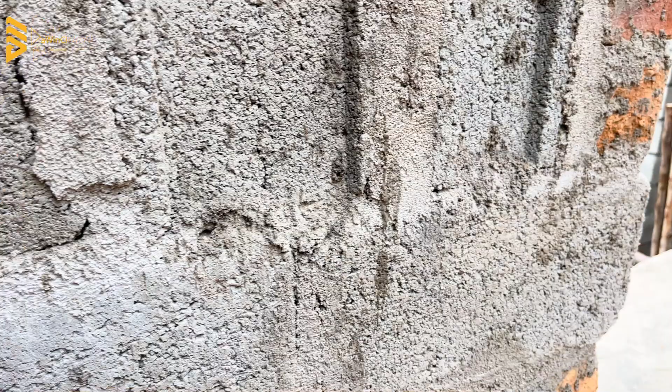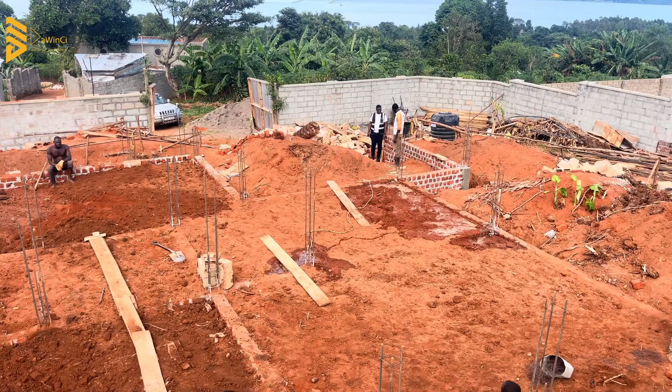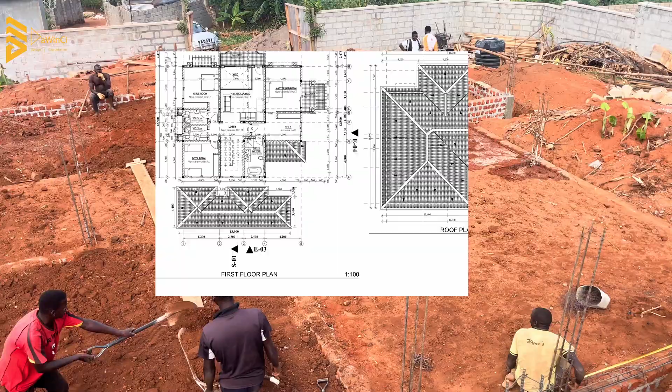In this video, we are going to discuss the documents that you actually can't build without. First of all, you can actually build with none of these documents. Yeah, in Uganda, anything is possible. You can build without a plan, without a structural design, even without approvals, just by telling the builder, you do like this, and then the building is up. But in this video we are going to discuss the documents that you can't build without.

The building we're talking about is building right. So you can't actually build right without these documents. I'm not going to mention them in chronological order, just out of the blue. And just a heads up, you can build with just some of these documents, not all. Some of them are compulsory, some are essential, some are mandatory, and others are not.

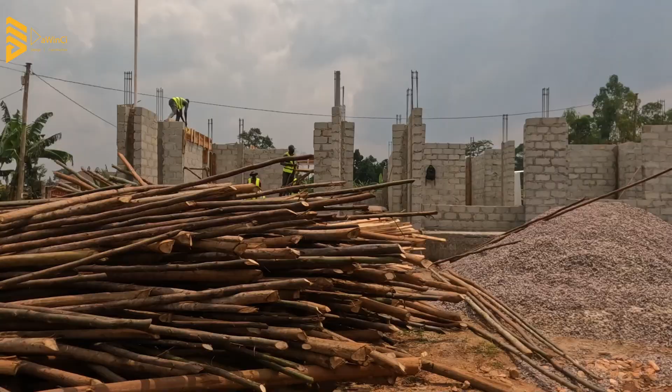To start with, I want to mention one of the rarest documents, the LC1 letter. That is the letter written by your LC1 chairperson, your local chairman, introducing you to the council, saying that they actually know this person. Now, if you're building in different areas, you'll find that a lot of areas in Uganda do not require that document. If you take your plans for approval, not all municipalities or town councils will ask you for these documents.

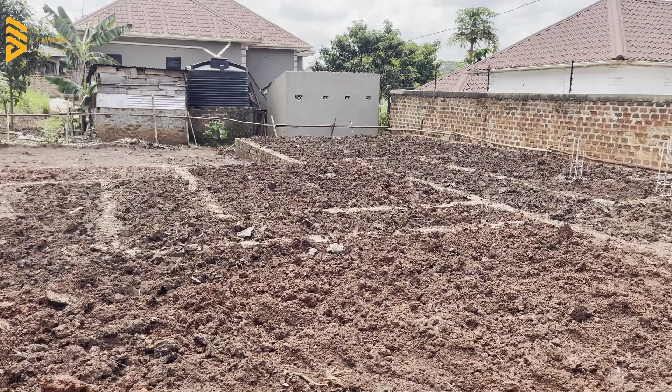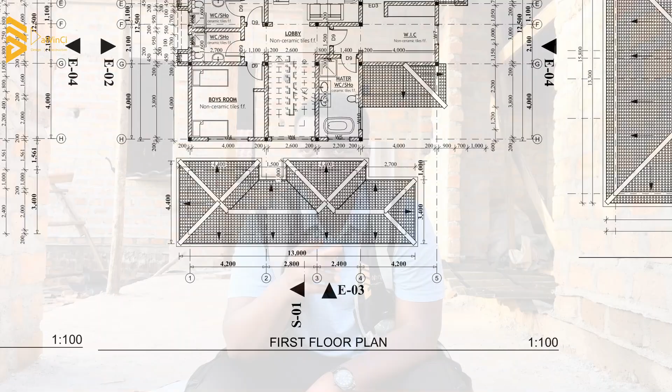But because there have been a lot of land wrangles, where two people are fighting over the same plot, one will just go start construction so he can use it as evidence in court to show that he even started building, he even got approval. So in areas where land wrangles are prevalent, when you take your plans to the local council for approval, they'll ask you for a letter from your LC chairperson to show that they actually know you and that you own that land, because a lot of these other land documents can be forged.

If you're building in places like Kajjansi, Wakiso, or Kasangati, you will need that letter. It basically introduces you, through your chairman, to the town council, confirming that they know you and that you're going to build in this area. In a lot of other areas, you don't need that document as long as you have the rest of the pre-requirements for approval.

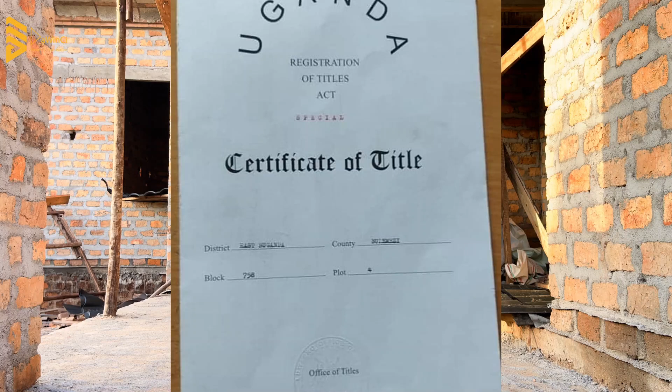The other document is a land title. Of course, this is for people building on private mailo land, not really on Kabaka's land. Usually people on Kabaka's land don't have titles, so they just have sketches of how their land looks, the dimensions and all that. But when you have private mailo land, you actually have a title, which shows the plot number, the block number, the location of the plot, and also the names of the owner of the title. So a land title is really important.

That brings me to what we call a survey report. In areas that are not private mailo land, like Kabaka's land, you might have dimensions like 50 by 100 by 130 by 100, but those aren't really exactly accurate. That's where the surveyor comes in, when you're building in a place and you don't know where the mark stones are, or sometimes you have a very old title and the dimensions are not to scale.

They are there, it's 30 meters, but it's not exactly to scale. That's why you need a surveyor to actually make a survey report to show exactly the shape of the land and the size of the land.

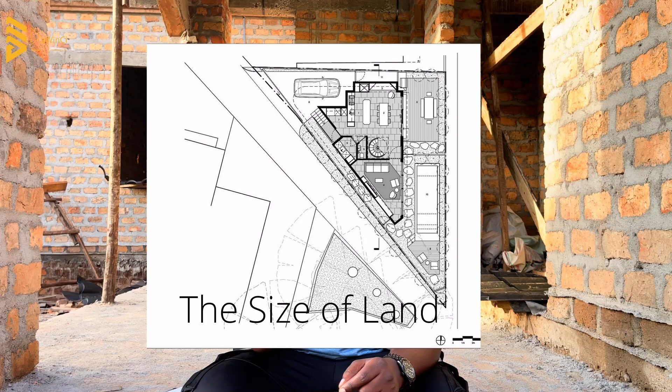That's very important. Actually, in some areas, in some town councils, to build you must show a survey report. You can't build in Kampala, KCCA, without a survey report. It shows the different encroachments that have happened on the land.

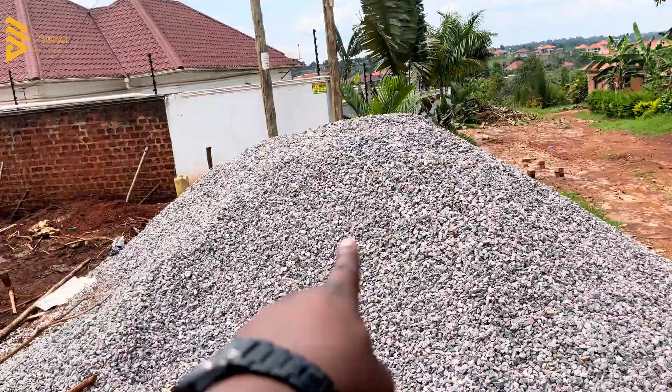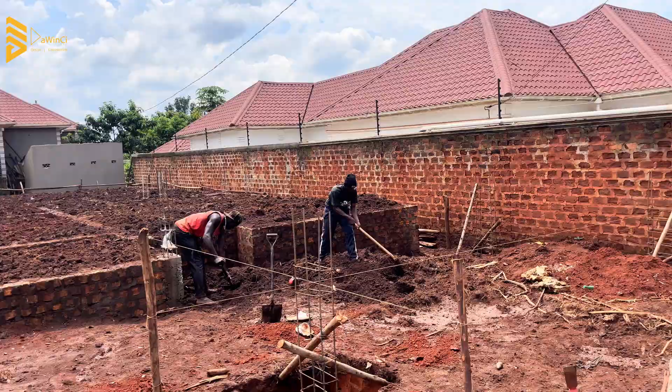It shows if probably they built a new road there, it needs to be showed on the title. If there is an electricity pole, if there is a drainage system by the council that is passing through there, it has to be shown. If there is a pipe of national water running under your land, it has to be shown there, okay?

So that is basically to avoid all discrepancies of finding that we've designed something and then we reach on ground and it actually doesn't depict what the title shows. So that's very important.

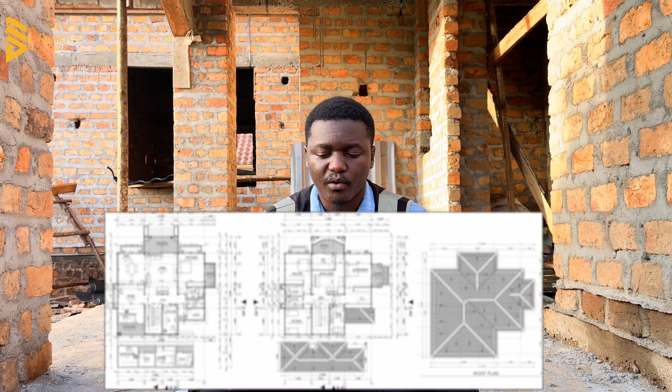Now the other one of the most important documents, actually this is the most important document, is the architectural design. Now an architectural design is basically what is famously known as the plan, the plan of the house.

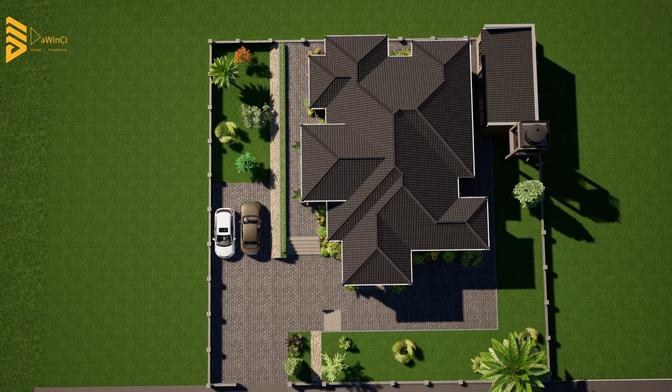Though it's actually referred to as the plan of the house, it's actually more than just a plan. A plan is just really viewing the house from the top. It has the floor plans, it has elevations, it has also, most importantly, artistic impressions. I've seen scenarios where people want to build and they have a plan, elevations and all that, and they don't have artistic impressions.

Artistic impressions are pictures showing how the house is going to look like on the outside. The plan in our age and era cannot be sufficient to actually provide enough information for someone building, or a contractor, to actually pull everything from the plan and put it on ground as it is.

So basically when you look at details on the plan, sometimes it shows how the drainage of the compound is going, which parts have grass, which parts are green, which parts are not, and it shows the roof plan—basically everything, how the rooms and spaces are arranged, the size of bathrooms, sizes of windows and all of that. So an architectural design really is like the benchmark of everything.

Before you build, at least with the plan, you can build even when you don't have all other documents, okay? Then the other document that I should talk about is the structure design.

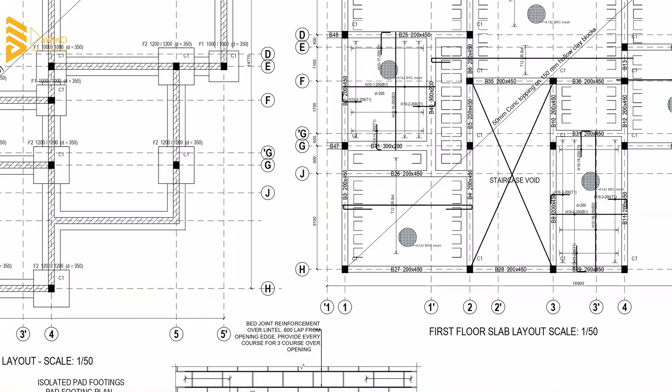Now, a structure design is basically the design showing the iron bars, I mean the reinforcement detail, the sizes of iron bars, their arrangement, the sizes of the rings, how deep is the foundation, what's the size of the pad footing, what's the reinforcement in the pad footing.

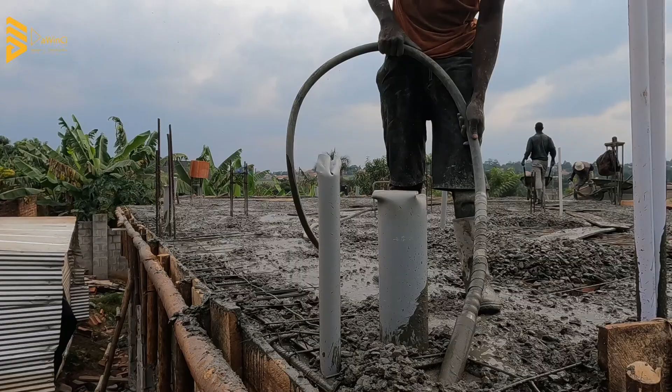What grade of concrete are you using? Are you using grade 25? Are you using grade 30, grade 32.5? What grade are you using? All that is detailed in the structure design.

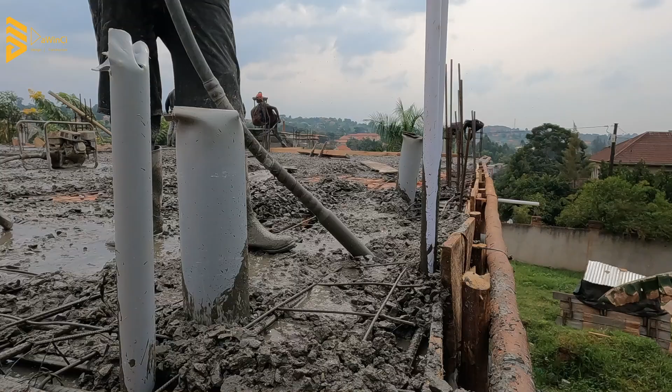Now, to be frank with you, if you take approvals out of the picture, you actually can build without a structure design—by any engineer who has developed good judgment of how reinforcement should be arranged in a building. The challenge with that is there is a lot of speculation.

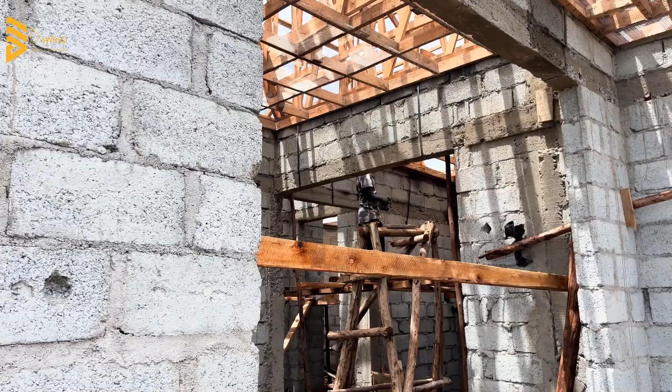So most of the times you are designing so that the building is safe. When you predict that we'll need 4 iron bars in this beam, you'll say, because I haven't designed, I will put extra 2 bars just in case I haven't calculated well. So you find yourself over-designing, putting more reinforcement than the building actually requires to stand on its own.

And then also, remember when we are doing structure designs, we actually use software. Quite a number of softwares on the market can actually do structure design. Whereas they are designed to be used by technical people, that is structural engineers, someone who has had a lot of technical know-how in the construction industry can actually use those softwares to produce a structure design.

The problem with that is that a lot of these softwares are based on foreign systems. Usually the ones on the market use the Eurocode. The Eurocode is actually based in Europe. So the problem with that is...

When you get different elements from a building, that is mainly I'm talking about storied buildings, and then you put them in the software, the software automatically calculates for you everything that you'll actually need, the reinforcement bars, the details.

It can even produce for you some things that are working drawings. Now, the problem that comes with that is that most of these softwares will over-design. That's why you find people when they're building and putting Y16s in beams, when there's no span, no clear span that exceeds 5 meters or 5.5 meters.

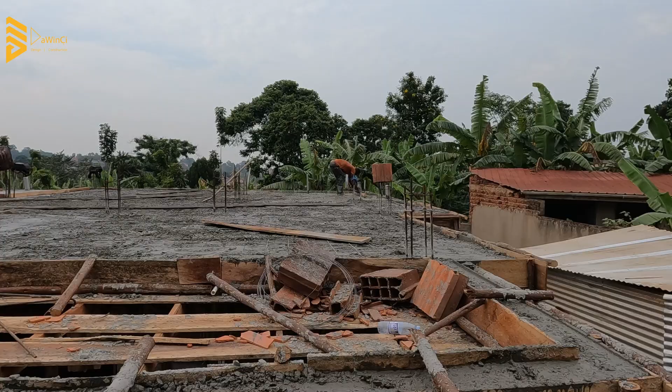Now that's a big issue, because whereas you're trying to cut the cost of getting a structure design from an actual structural engineer, here you're actually paying more, but this time in materials, not in the design itself. So you find you're having a lot of reinforcement, a lot of strong concrete, even when the building might not actually require it.

So that's very important. So at the end of the day, I had talked about the architectural design. The architectural design has to be stamped by a registered architect, and the structural design has to be stamped by a registered structural engineer.

Now, all those, of course, are on blueprints and all that. Why I'm saying they must be stamped by this and that is because this is a pre-requirement for approval. You can't take your plans or your structure design for approval unless they're actually stamped by a registered engineer and registered architect, respectively, as I mentioned before.

Also, just to clarify a bit between the architectural design and the structure design: the architectural design is basically for bungalows, and then for storied buildings, you need both an architectural design and a structure design, because a bungalow does not have structural columns mainly. It's really at a very minimal level, basically walls and the roof and all that. There's no need of a lot of digging, excavation, and putting pad footings and all that.

But when it comes to a storied building, you have to have a structure design, because it's basically the structure frame that is holding the house together. There's a suspended slab over the ground floor, so it has to be structurally designed. So if you're building a storied building, you must have a structure design. For a bungalow, you can do it without one, it's actually not a pre-requirement for getting approvals from the local authorities.

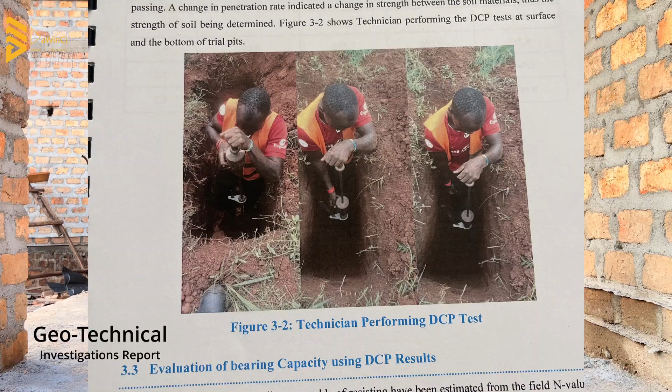So let's go now to the Geotechnical Investigations Report. This is a report usually for areas that are in cities. You know how Uganda has been cityfied these days - not sure if that's the right word, but many areas have actually been made cities. We have Gulu City, Jinja City, Mbale City, Mbarara City, Kampala City. So all those are now cities.

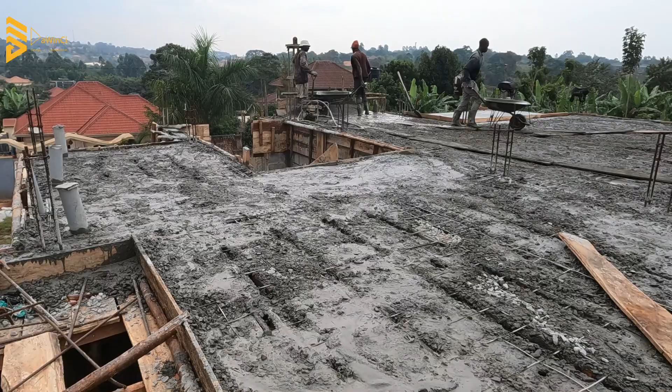So as they become cities, the planning becomes more stringent. So whoever is going to develop in such areas, or areas within the vicinity of the city, the regulations become more and more. So if you're putting up a structure that has more than 3 floors, it is compulsory to actually make a geotechnical investigations report.

Now, this report basically shows the strength of the ground at different levels. So this is a document that is going to aid the structure design. The structure design this time is going to be based on the geotech report.

That document basically involves going to the ground, digging different trial pits where the building is going to sit, and then taking those soil samples to the laboratory to do different tests on them. There are shear box tests, dynamic cone penetration tests - all those tests involved, okay?

After getting those results from testing in the lab, we use those results in actually making a structural design, just to be sure that the ground where you're building the 3 floors is actually able to hold them, or if it's not able, at what depth must the building be for it to be able to carry that building.

So that's very important. If you're building 3 levels and above, it has to be there, and it has to be stamped by a registered engineer. Or it has to have a stamp from a certified laboratory, a laboratory that is certified to actually test construction materials, and that's very important too.

Then the next one we can go to is the electrical, mechanical, and plumbing drawings. Usually they call them MEP drawings. Though to some extent, mainly for residential buildings, it's mainly in the line of electrical and plumbing drawings - I think I've explained this before. Basically, this is where all the lighting points are indicated, how the wiring is going to go in the whole building.

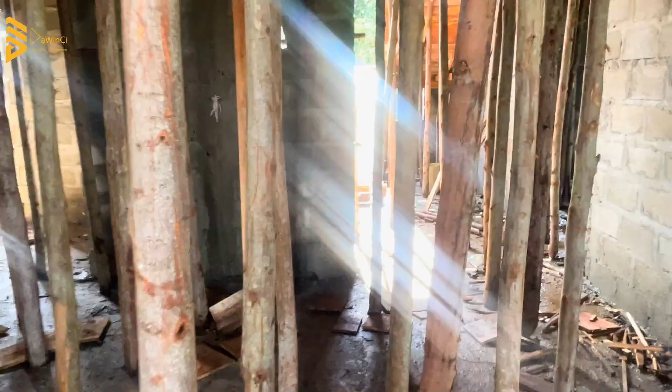With that kind of arrangement, it's possible to actually build without these drawings, because at the point of the slab, you can just bring an electrical engineer or electrician to provide different wiring points. The problem is that there'll be a lot of speculation and guesswork. Someone might say, this is a living room, so we'll just provide for one light in the center. But in the design, you may find you didn't want just one light — you wanted one light and maybe four others on the sides. And if the electrician on ground has nothing to follow, he will just use his personal judgment.

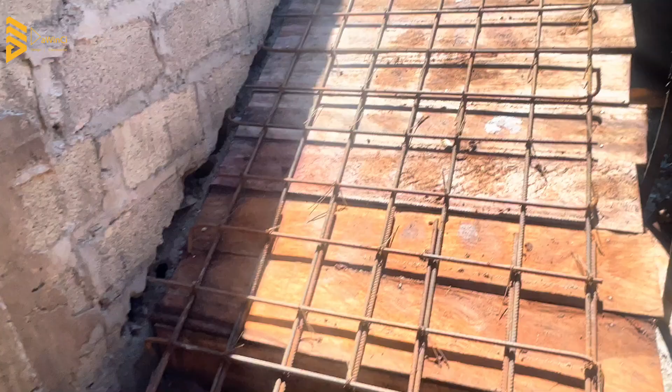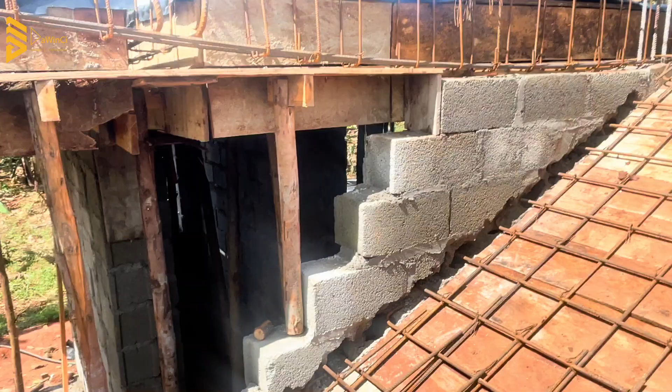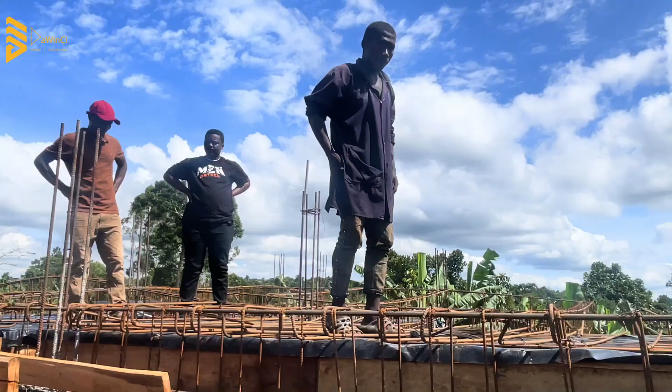If you don't pass through those conduits earlier, you'll find in most older buildings that there are wires running on surfaces of walls, and plumbing pipes running on surfaces of walls, which really does not look desirable in the modern age. But with electrical and plumbing drawings, a lot is planned very well, such that even when you reach a building, you hardly can see any pipe, or see where any pipe is actually coming out of the building. That's very important to note.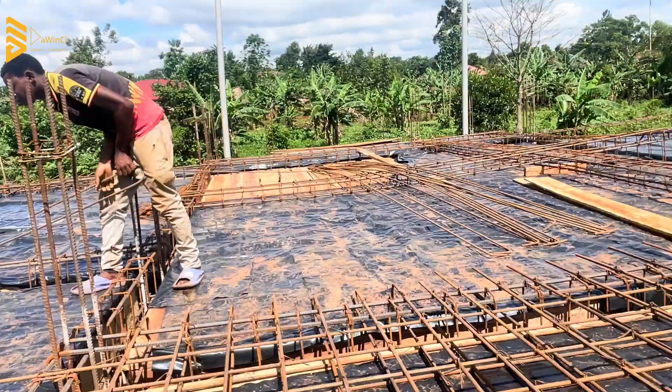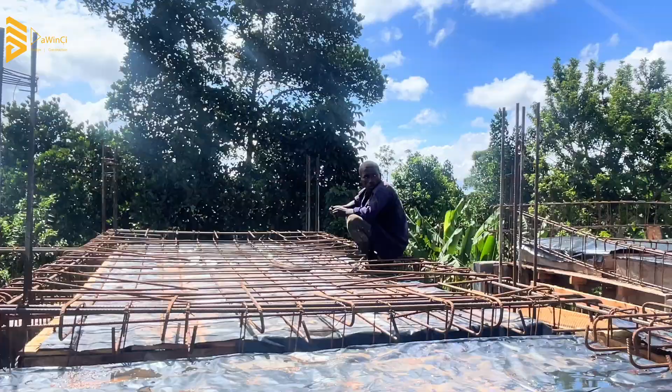Then the other document I can talk about is the bills of quantities. There's what they call a bills of quantities, and then there's what we call a material schedule. For a lot of people, we confuse the bills of quantities and the material schedule. Because we are talking to a layman, sometimes you can call a material schedule a BOQ, because that's what they'll easily understand. But the bill of quantities basically shows you, for example, the cubic meters of concrete that you need. Let's say you're going to cast a slab like this one, you'll know I'll need maybe 20 cubic meters of concrete — that's the quantity of concrete you'll need.

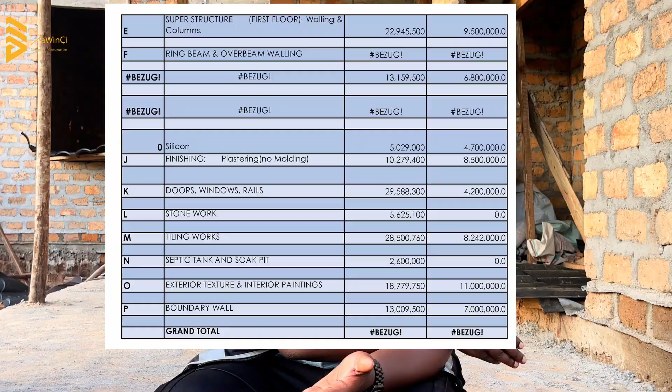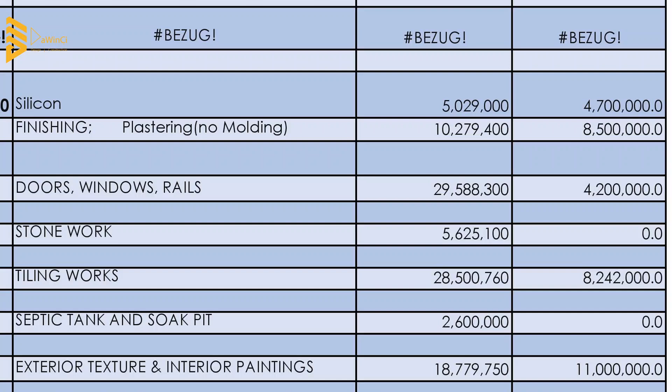But to break it down into materials, that's what they call a material schedule — what makes the concrete. For maybe these 20 cubic meters of concrete, I will need maybe one sinotruck of aggregate, one sinotruck of lake sand, and maybe 100 bags of cement to achieve that. That's what is actually a material schedule. But most of the time we just call it bill of quantities even when it's actually a material schedule.

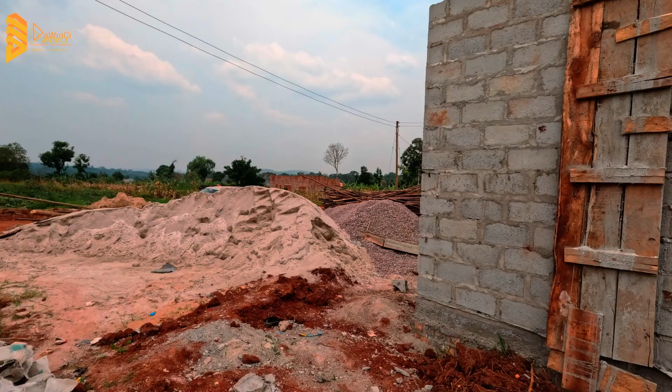This is basically for planning purposes. If you know you're building in phases, or you have limited cash, you want to know how much the building is going to cost by the time you finish up to a certain level. Even the bill of quantities can be phased. Maybe you do it from the foundation up to the ground slab, then the walling, then the slab, then the first floor — it's phased, but you know at the end of the day how much you're going to spend.

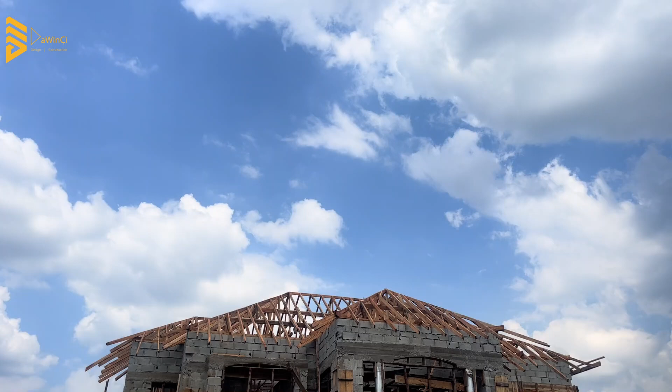It's difficult to have this very accurate, but in most cases, if it's done well, it should be within tolerances of plus or minus 10%, 15%. So let's say you plan for 100 million for a certain phase, you might want to have 110, just in case something happens. It's really a rare occurrence, but it can happen.

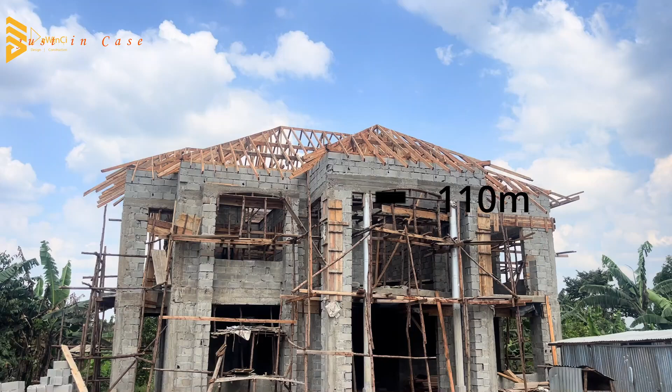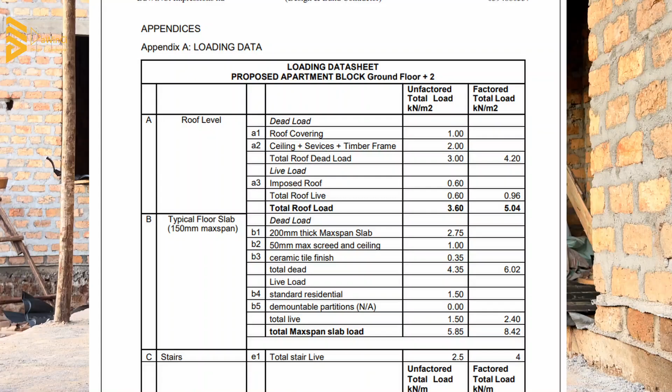Then the other documents that you might need — for the structure design, I forgot to mention there is what they call a structure design report. For many of these areas, besides the structure design itself, it should come with a structure design report. This is basically a booklet showing the calculations of how the structure was designed. For instance, if there's a gym in the building, someone approving at the council level can see there was a gym planned, that we estimated the gym is going to carry this kind of load, and that we've designed for it in this manner.

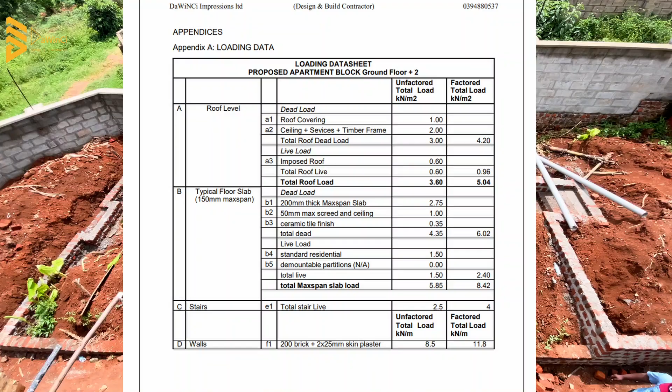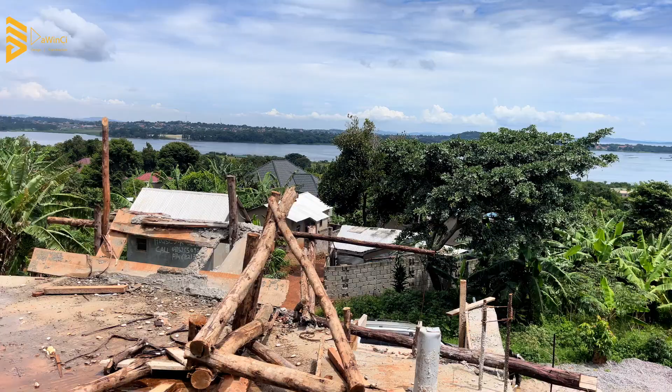This structure design report also helps if you want to make future modifications on the building. For example, if they come to make modifications, they want to know what this building was designed to carry - if it was designed to carry vibrating machinery, it can also act as a gym. But all those details are in the structure design report. Usually people don't even care, because you can't easily understand it unless you're a technical person.

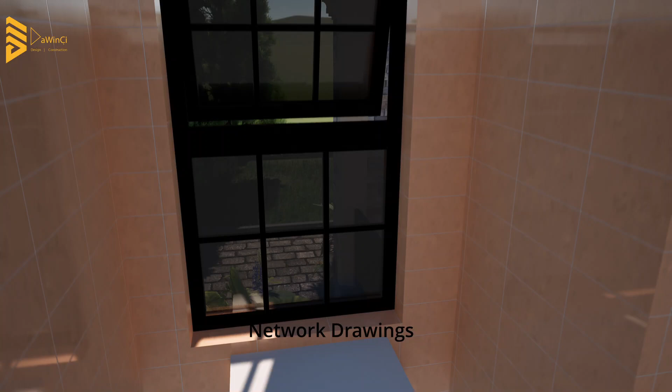Then the other document we should talk about is network drawings. In Uganda as a country, we haven't really developed enough capacity yet to produce network drawings at this lower level of residential houses, but for bigger buildings like shopping malls, bigger apartments, or hotels, you can actually do network drawings, but they're quite expensive to make.

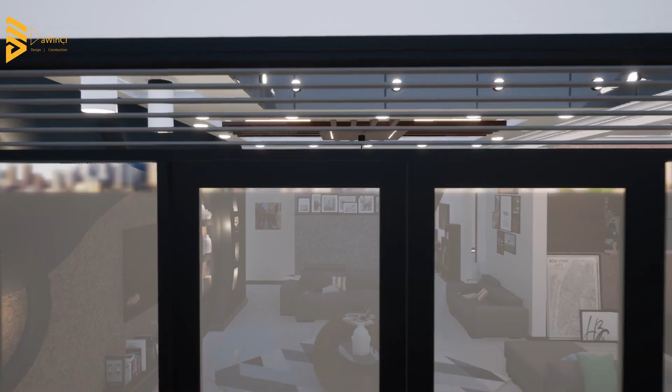So what are network drawings? They show us how the communication in the house is going to be - that is digital communication. If you have cameras in the house, how are they linking to each other? If you're going to have fiber internet, where is the router going to be? Where is the home office going to be, so you can provide an Ethernet port there? Where is the TV going to be, so you can provide an Ethernet port there too?

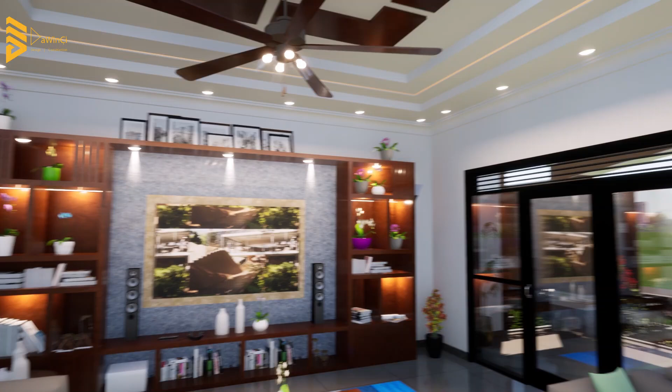So you can easily connect to Netflix and things like that - you have a port there for internet, so the TV doesn't have to use Wi-Fi, because sometimes Wi-Fi can be weak, but an Ethernet connection is actually much faster in most cases. Basically things like that - where the antenna is going to be, and so on.

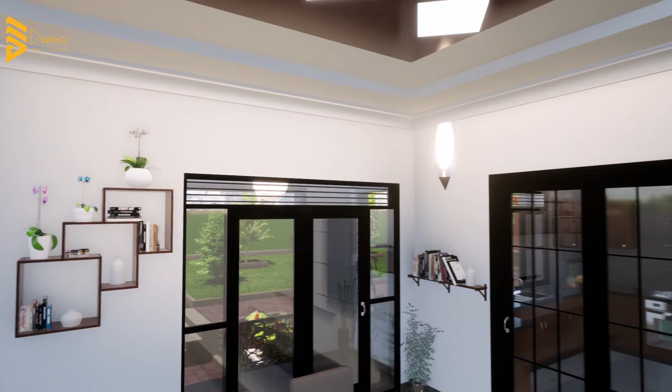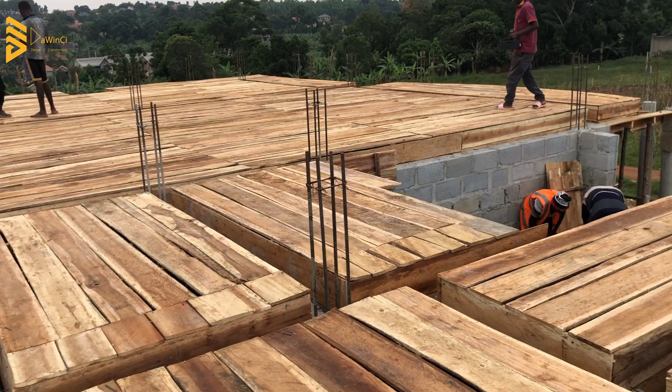But for most of those, ordinarily we usually just plan for them. That really depends on your engineer, the exposure of your engineer on site who's guiding you through all this. So when that stage comes, you can easily provide for all those things. Sometimes it's not really worth it to provide a network drawing for something that's just going to have a TV, maybe a router somewhere, and just a few cameras here and there.

Maybe even intercom - that's the camera system you use where, when someone is at the gate, there's a camera and they can speak to you while you're in the house. So if you have a guest or visitor who needs something from you and they've come to the gate, you can see them and even talk to them through a certain telephone network.

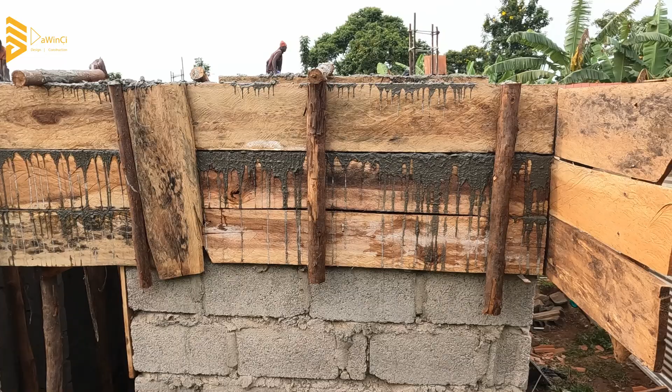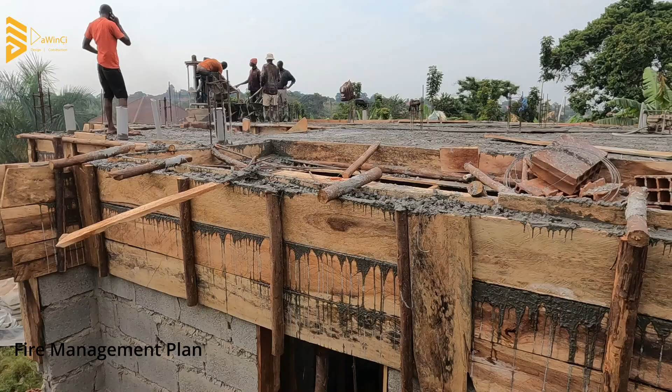Then the other document I might talk about - this might apply when you're building a high-rise residential apartment or a bigger commercial building, though this channel is mainly about ordinary buildings, not more than 6 floors. That is the fire management plan. If you look at many apartments designed with five floors or more, even 4 floors, or even a 2-floor apartment within Kampala KCCA, a fire management plan is very important, because you need to know you're having people living in this space.

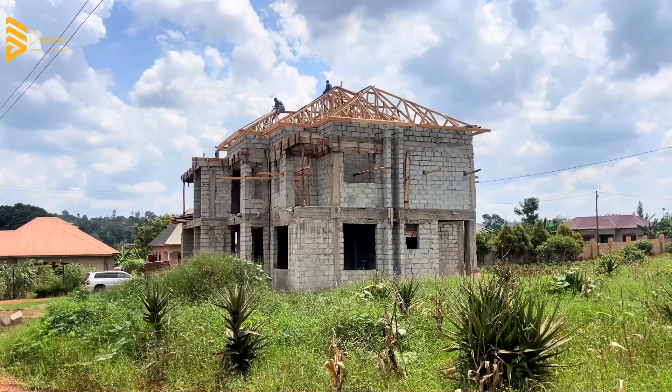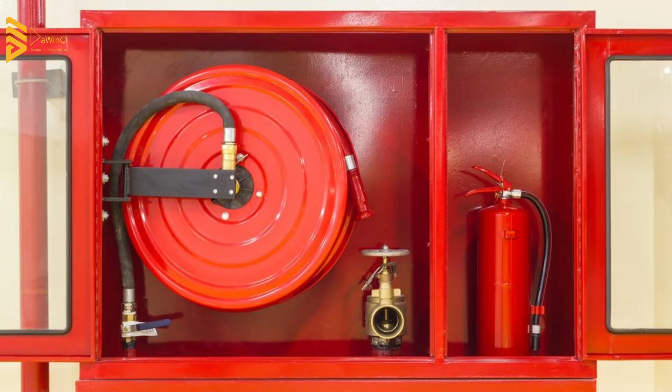You might want to provide for a fire exit or emergency exit. You might want to provide for a fire assembly point. You might want to provide for the fire hose reels, where the fire extinguisher is going to be used in case there's a fire or anything of that sort. That's when you're working within areas like KCCA, areas very close to the city where regulations are a bit more strict. But as you go outside, you don't have to provide for a lot of that, though it's still important for the developer and users of the building.

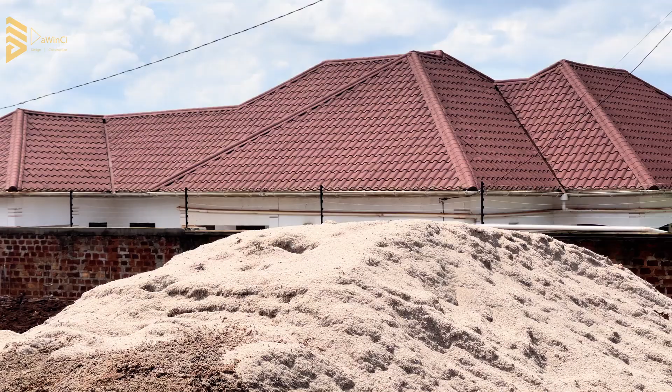I think those are the documents that are very important that you need when you're going to carry out your construction. But a disclaimer - you can actually build without these documents, or without some of them. It depends on where exactly you're going to build, what the regulations are in that place, and what is required of you, the engineer, or the architect to include in the plan before it can be submitted for approvals.